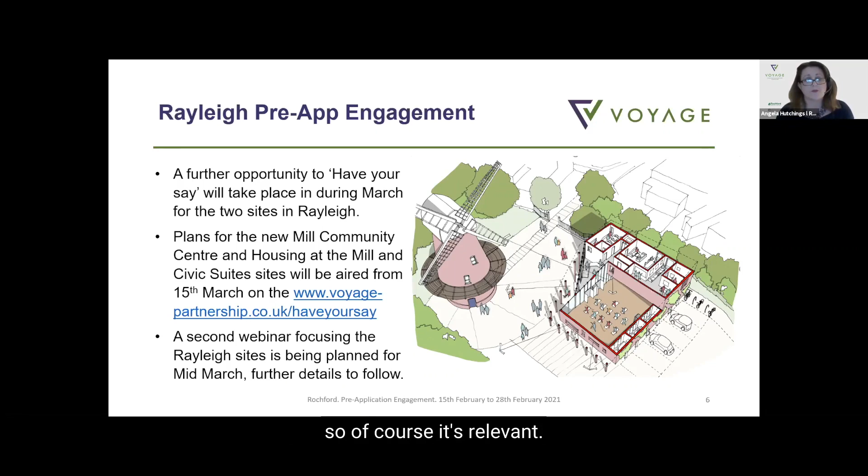So we will do all this over again on the 17th of March when we'll specifically be addressing the Rayleigh sites. And as Mike says, that doesn't mean you can't ask questions about that tonight, but because we are taking a programme approach, of course it's relevant. But please be assured that we will specifically focus on the Rayleigh sites, and in particular the Mill Hall, next month. Thank you, Mike.

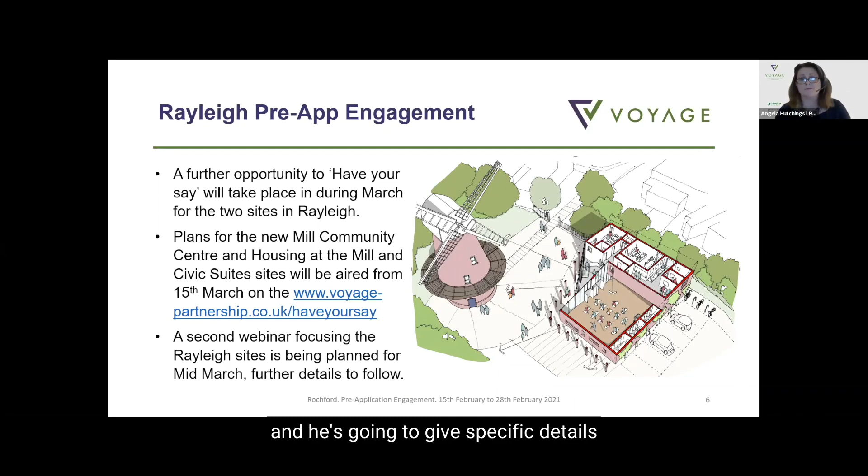Thank you, Angela. I'm now going to hand over to Peter Buist, who's going to give our next presentation, and he's going to give specific details of the designs, the core principles, and the importance of our heritage relating to each of the three Rochford sites, in what will be the longest presentation this evening. Over to Peter. Thank you.

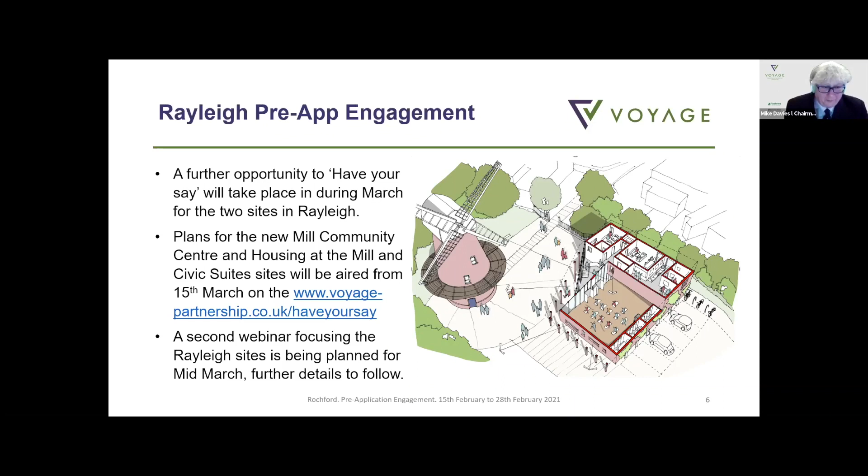Thanks, Mike. Good evening. My name is Peter Buist, and I'm an architect from Purcell. We're a practice of architects, master planners, and heritage consultants, and we specialise in working with buildings and sites that have conservation and heritage constraints.

We've been working with GB Partnerships and Rochford District Council for approximately 18 months, analysing and understanding the existing sites and developing outline proposals for their future.

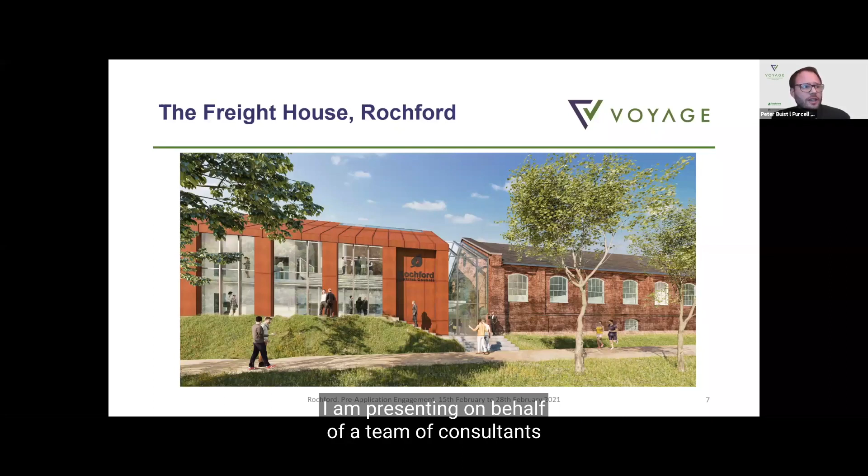Whilst I'm an architect, I am presenting on behalf of a team of consultants engaged on these projects, including many specialists such as civil, structural, and building service engineers, heritage consultants, tree specialists, and ecologists.

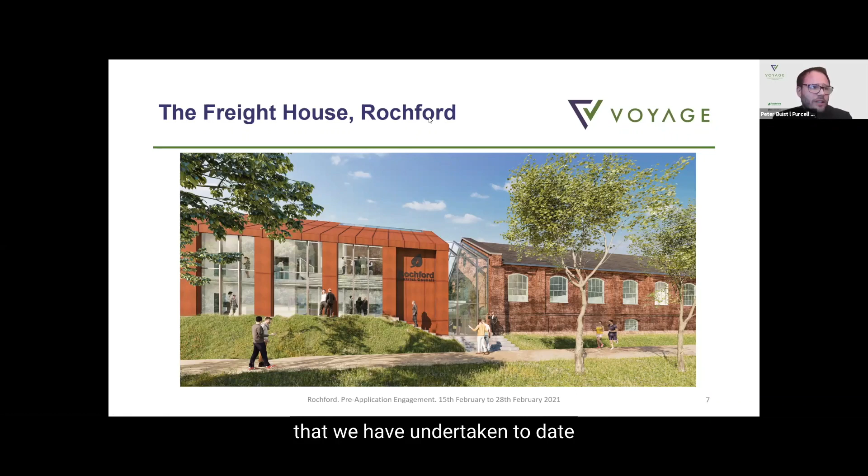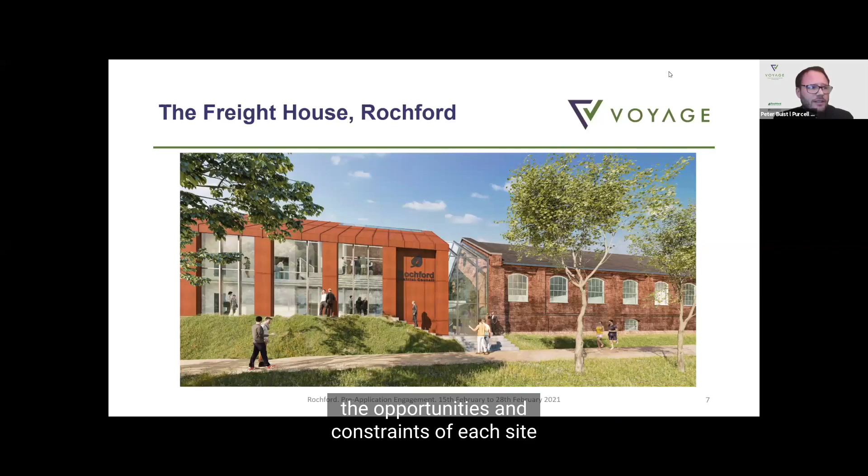I'll now provide an overview of the work we have undertaken to date across the three sites in Rochford, including the project objectives, the opportunities and constraints of each site, and the principles of our concept designs.

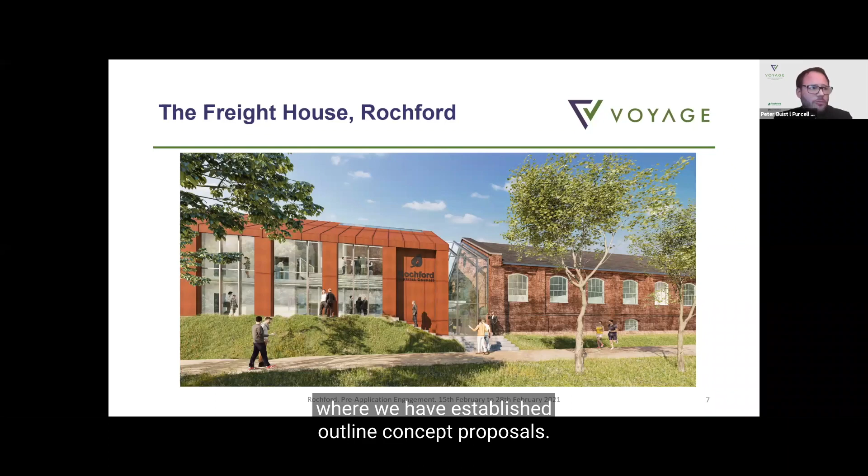The designs on each of the sites are at an early stage of development, where we have established outline concept proposals. I'll start with the Freight House and then move on to 3 to 15 South Street, and finish with number 57 South Street. So starting with the Freight House.

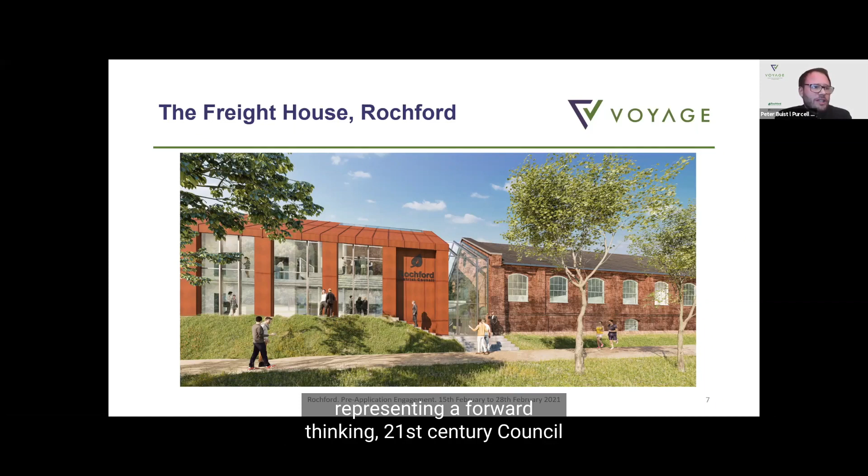The Freight House is to become a brand new civic and community hub, representing a forward-thinking 21st century council set upon the foundations of a rich and proud history.

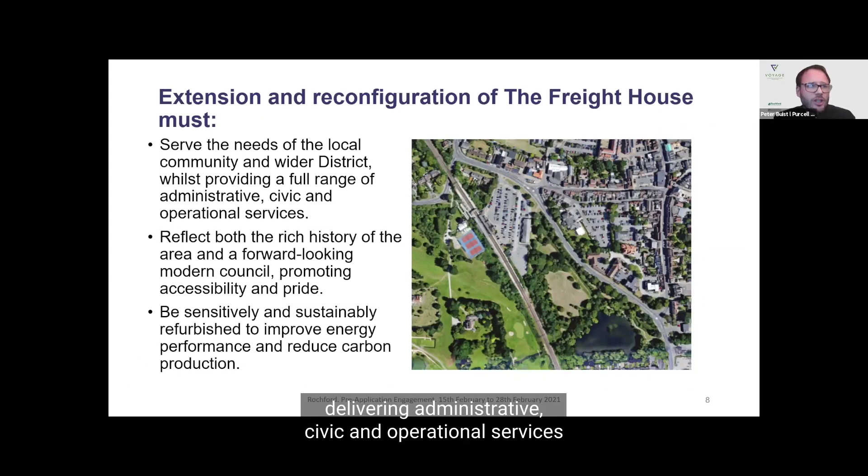This new community hub will serve the communities of Rochford and the surrounding district, delivering administrative, civic, and operational services within a welcoming, accessible, customer-focused, and safe environment.

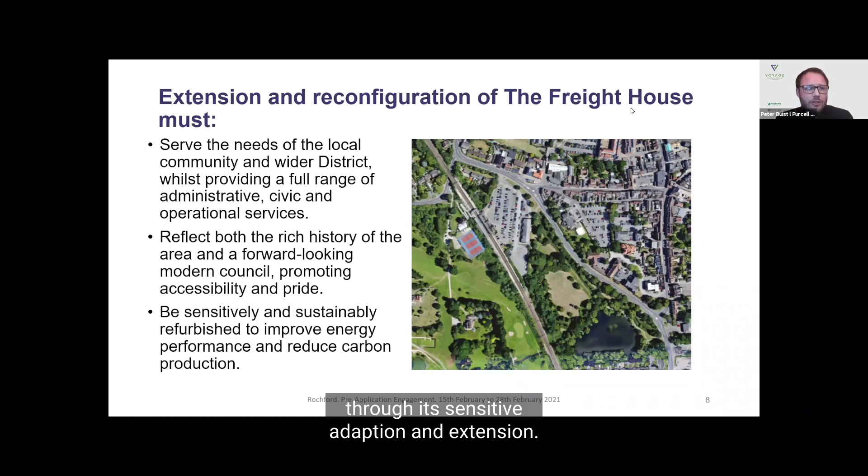The existing building offers a wonderful opportunity to create a facility that reflects the rich history of Rochford. Through its sensitive adaptation and extension, we can also create a sustainable, efficient, and modern building that fulfills the community's expectations of the council's services.

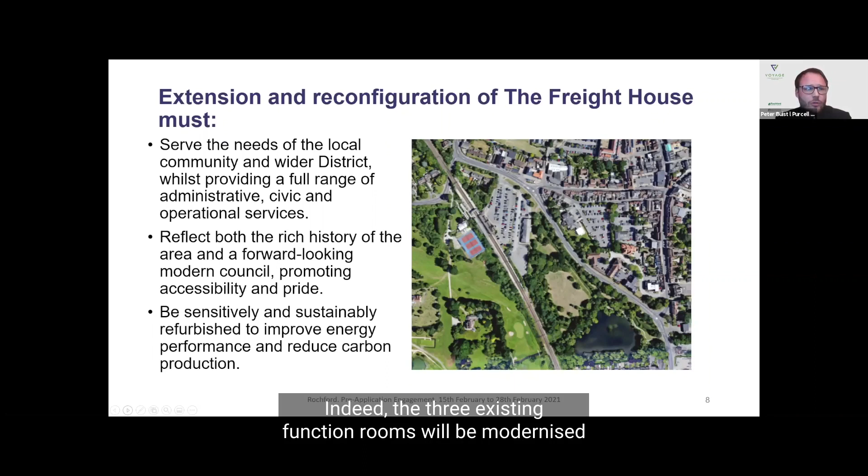The Freight House will continue to provide versatile and flexible space for many community, public, and private events. Indeed, the three existing function rooms will be modernised in order to best cater for the wide variety of local events.

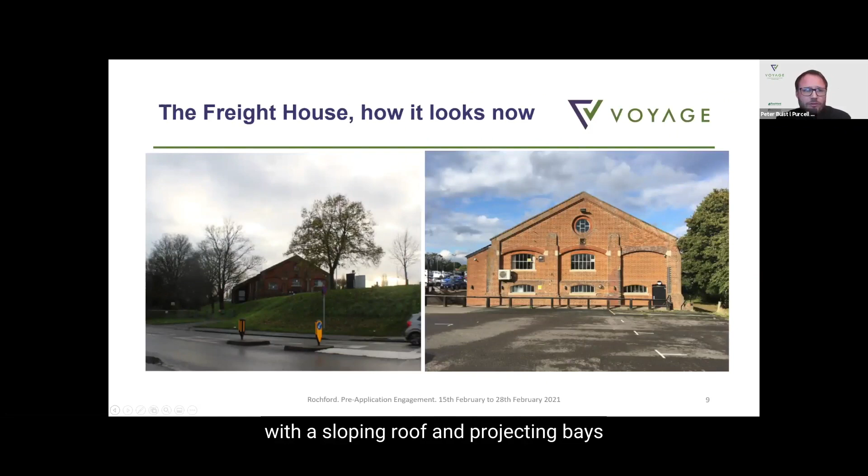The Freight House is a late Victorian red brick building with a sloping roof and projecting bays to the west elevation that mark out the various entrances to the building.

The Freight House lies along a north to south line and is a large building that sits on top of the grass bank that looks onto Bradley Way.

Bradley Way is a busy road into and around Rochford, and therefore the Freight House is highly visible to those coming in and out of the town.

Whilst its industrial heritage is still clearly evident in its external appearance and the internal plan arrangement, there have been some less sensitive adaptations and additions over the last 40 years. Our proposed refurbishment of the building is an opportunity to rectify these late 20th century alterations with more sensitive changes.

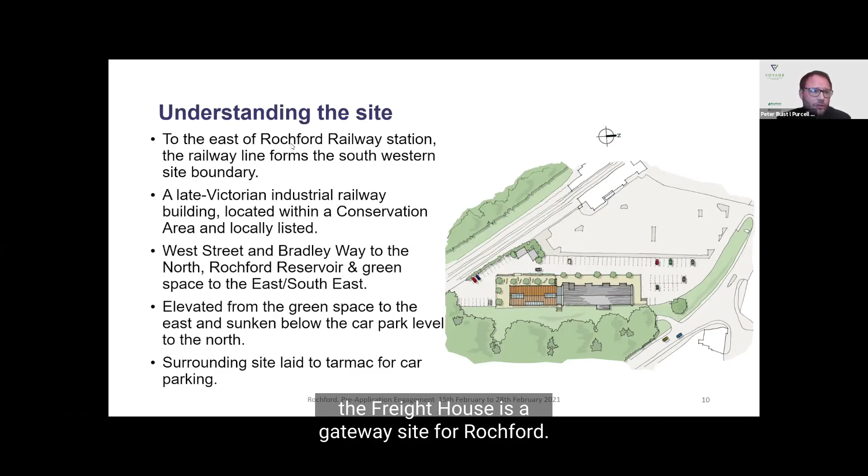Located opposite the railway station and above the busy road, the Freight House is a gateway site for Rochford. It is locally listed and located within the Rochford Conservation Area. Proposals must therefore be sensitive to both the building itself and the historic character of its surroundings.

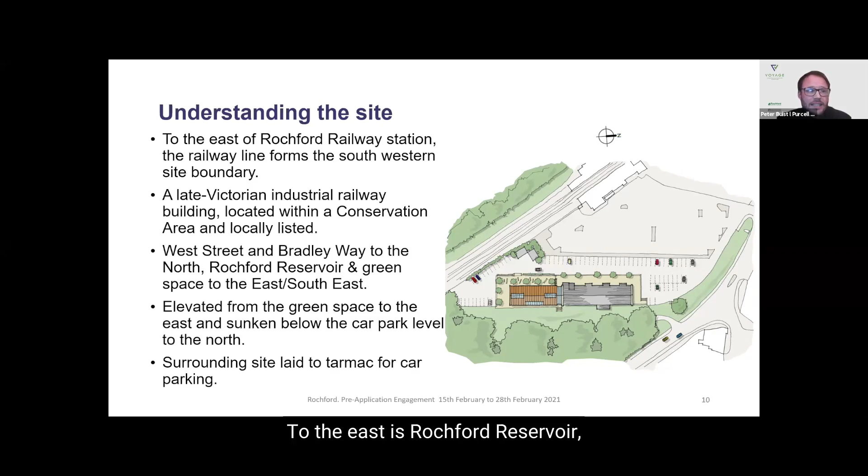To the east is Rochford Reservoir, creating a wonderful setting for the building and an opportunity for public and civic events to spill out into the adjacent parkland. The building itself is sunken below the level of the car park that surrounds it to the north, west, and south. Conversely, a steep grass bank drops down from the building's east elevation to meet the parkland and footpath that goes around the reservoir.

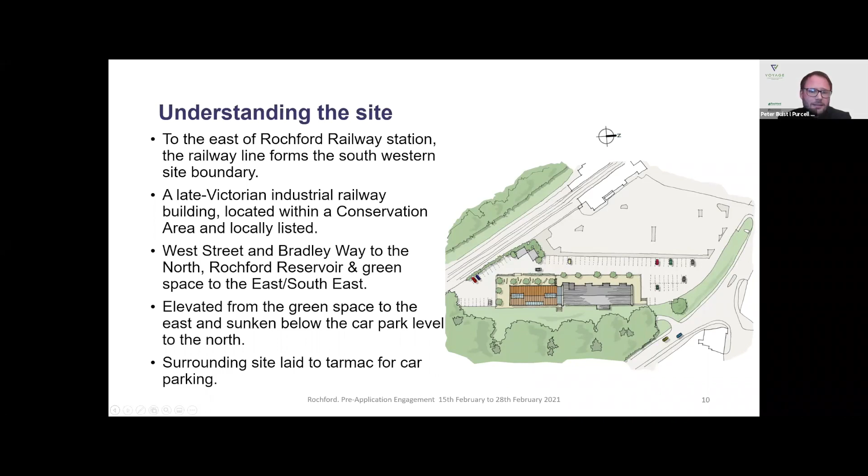To accommodate the council's brief, the existing freight house needs to be extended. We explored a number of options for the form, location, and size of the extension. These included new extensions to the north, west, and south of the existing building.

Locating the extension to the south of the site allows the historic freight house to remain visible from Bradley Way and maintains the important link with the railway station. The extension will also benefit from being close to the reservoir and parkland to the east. Through a new master plan for the site, the project is an opportunity to improve the immediate setting of the freight house, which benefits accessibility and functionality.

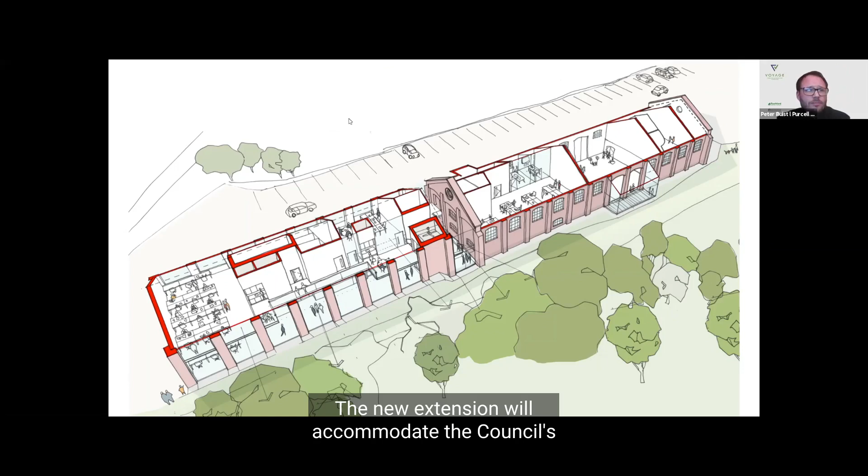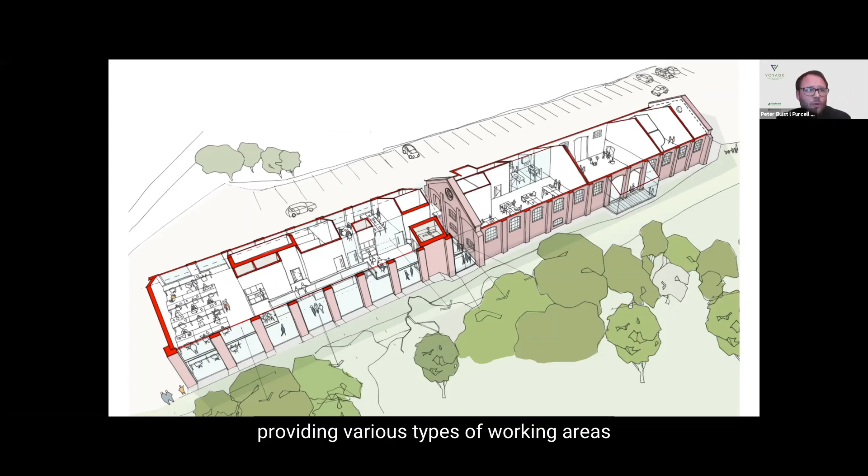The proposed new extension will be 2 stories high and has many similarities to the existing building. The new extension will accommodate the council's administrative functions. Office spaces, meeting rooms and breakout areas are located across the ground and first floors and will be flexible, providing various types of working areas for individuals and groups. Enclosed meeting pods will be provided for more sensitive and confidential meetings.

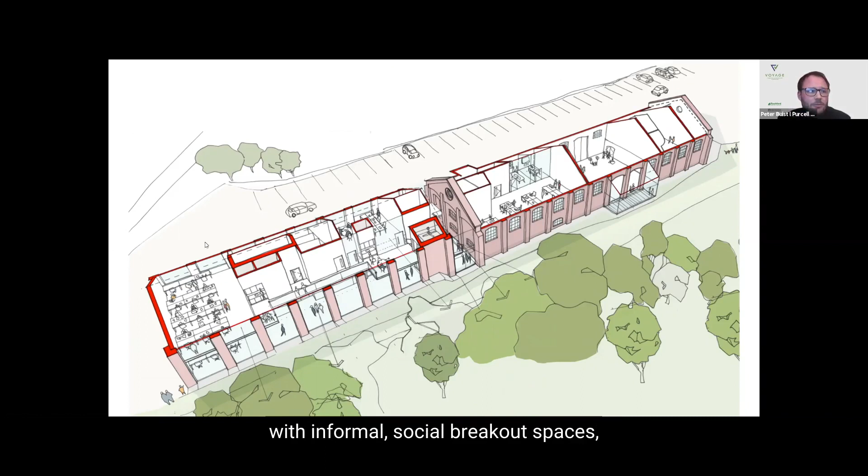An open double-height atrium allows people to move about the extension with informal social breakout spaces and lovely views over the nearby parkland, trees, and reservoir. A new lift will ensure the building is fully accessible to all staff, visitors, and public.

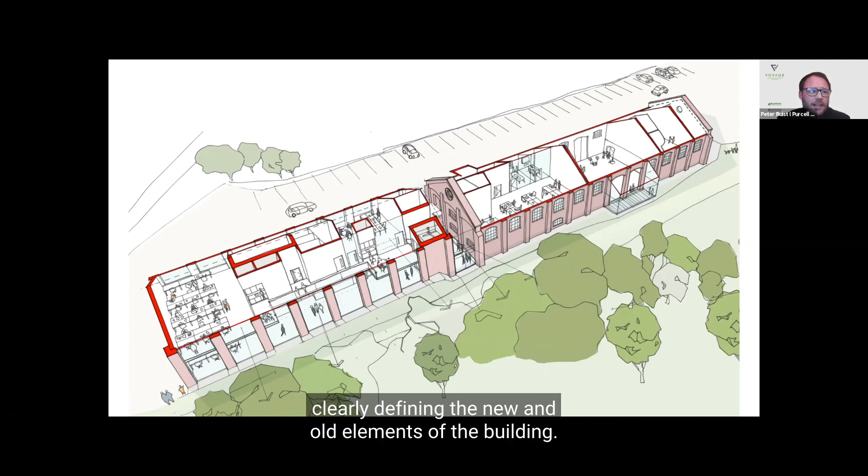A glazed atrium separates the new extension from the existing freight house building, clearly defining the new and old elements of the building. This glazed atrium will be the new public entrance, providing a wonderful arrival space which will make it easy to find your way around.

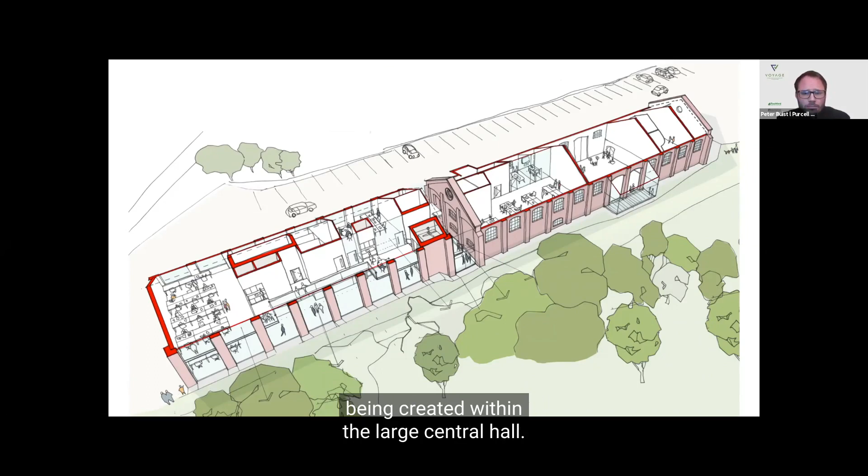The existing freight house will accommodate the civic functions, with a new council chamber being created within the large central hall. When not required, the chamber will be dismantled and stored to enable the large hall and the other 2 function rooms to be used for many other public and private events.

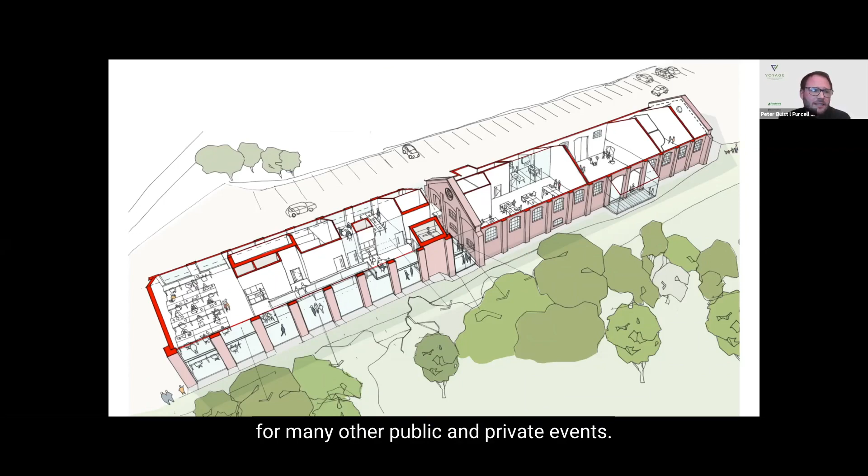The function rooms will be supported by modern kitchen and catering facilities. Bars and serveries and secure storage will also be provided.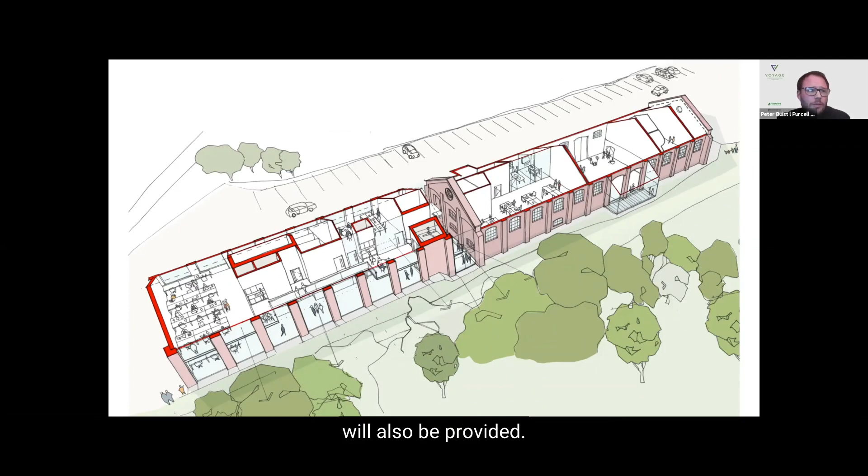The function rooms will be enhanced to control sound so that they best accommodate the wide variety of uses, as well as stopping noise coming out of the building during louder evening functions. Each function space is independently accessed so that events can be held at the same time without disturbing each other.

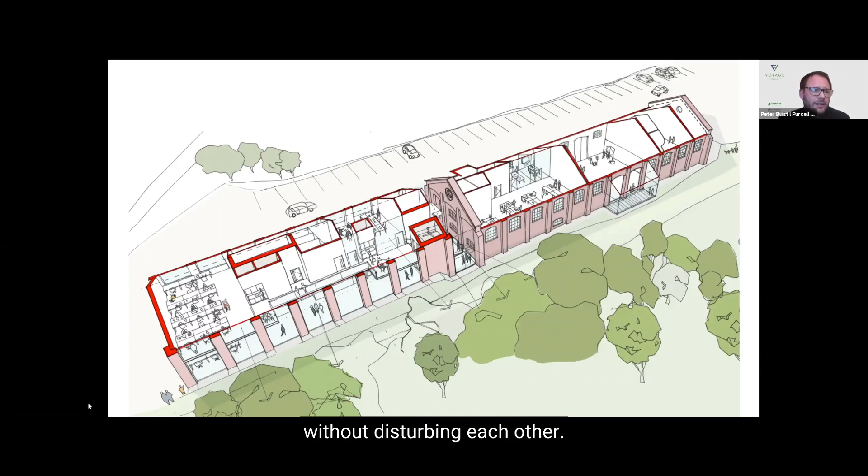So in summary, the proposals approximately double the overall gross internal area of the freight house, albeit the footprint of the new extension is smaller due to the more efficient use of space across 2 stories. The 3 existing function rooms within the Freight House will be retained and modernised to accommodate a wide variety of public and private events, including the installation of the council chamber.

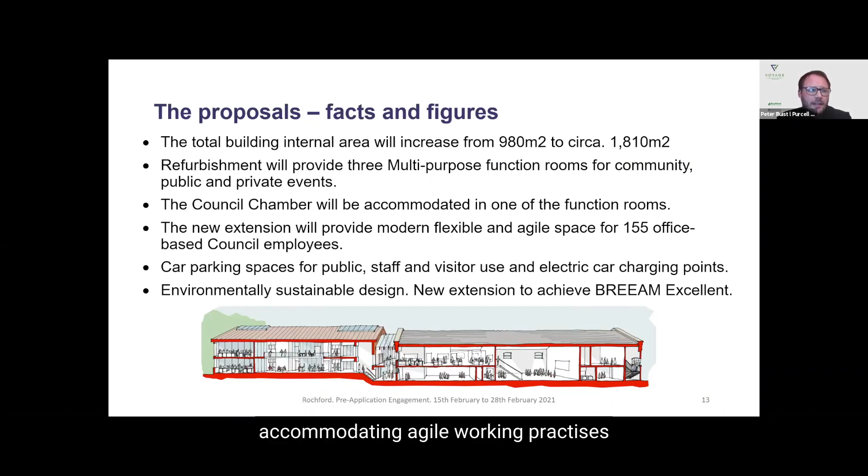The new extension will be modern, a flexible working environment, accommodating agile working practices and providing a wide variety of individual and collaborative working environments.

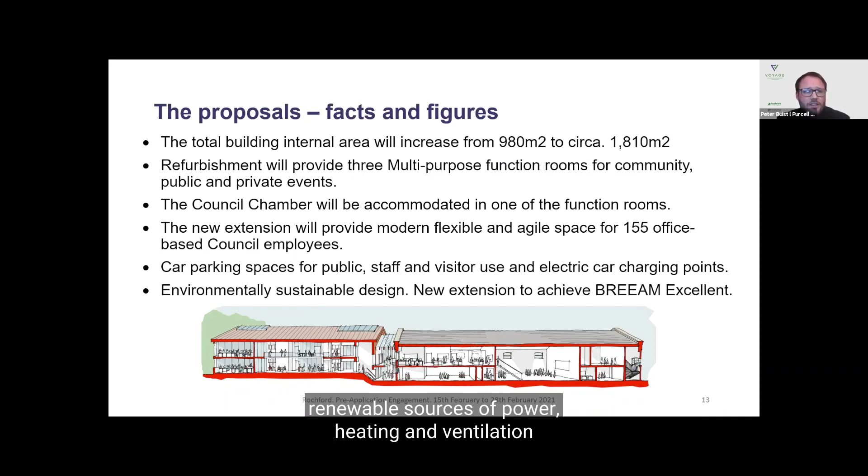Careful selection of materials, high levels of insulation, renewable sources of power, heating and ventilation, and car charging points will all ensure the building is constructed and operated as environmentally sustainably as possible. The project is an opportunity to create a truly unique public building for the communities of Rochford and the surrounding district. Next slide, please.

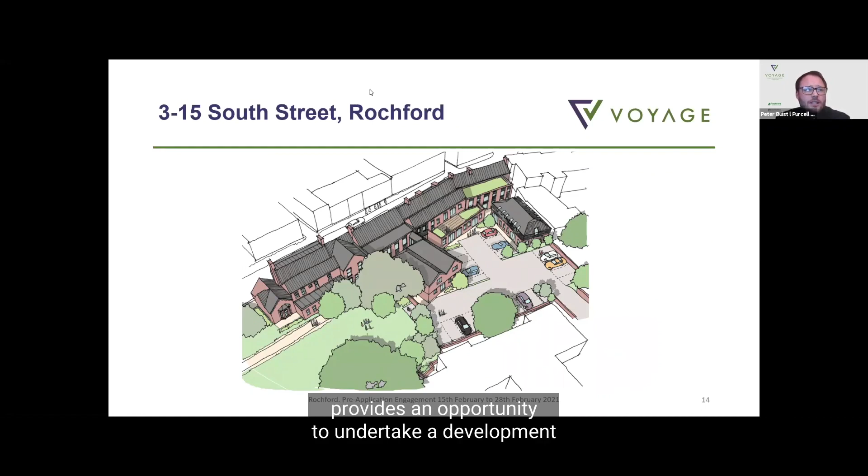A short walk from the Freight House is the site at 3 to 15 South Street. The relocation of council services to the Freight House provides an opportunity to undertake a development at 3 to 15 South Street that restores the existing historic buildings and secures their future through conversion back to residential use.

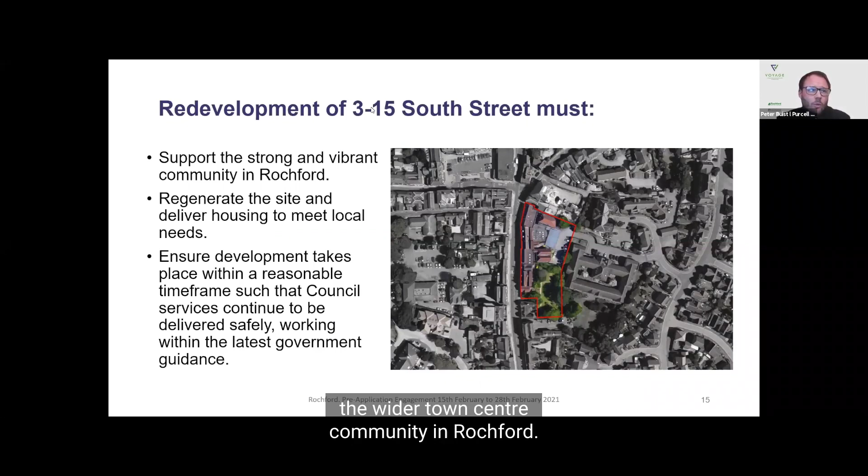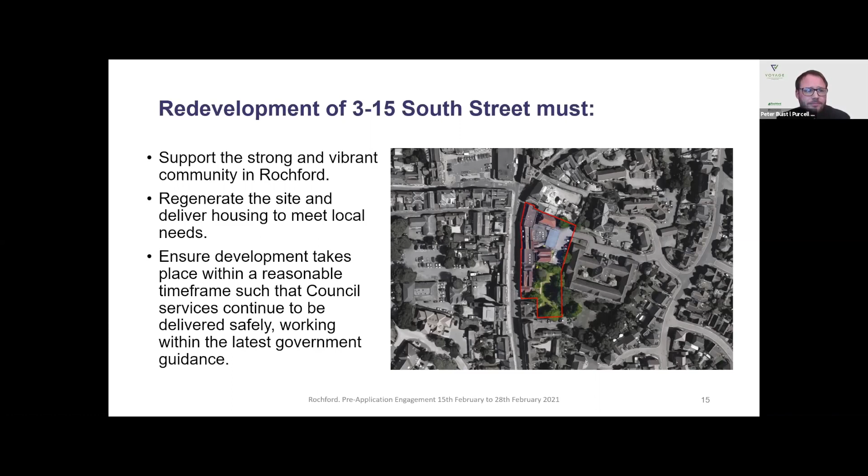The regeneration of the site will deliver high quality and affordable housing that will support and strengthen the wider town centre community in Rochford. The timing of the development will be carefully programmed with the Freight House to ensure council services continue to be delivered safely, whilst also delivering housing that meets local needs within a timely fashion. In addition, the development will retain, conserve and enhance the existing listed buildings and heritage assets on the site.

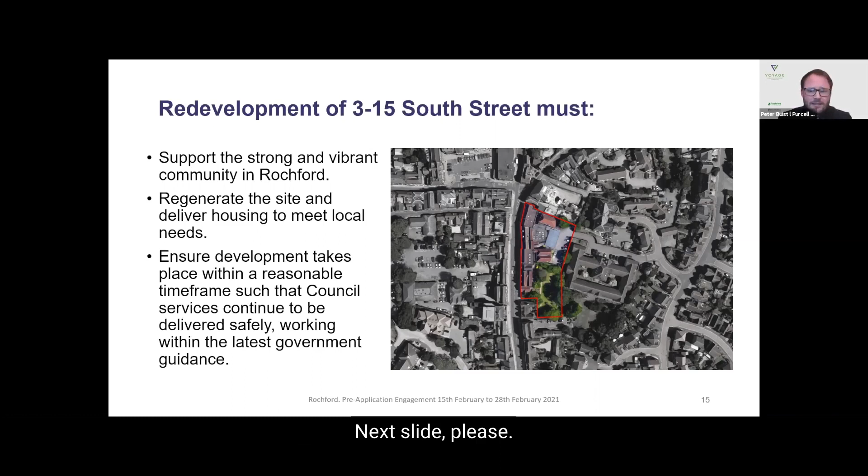Numbers 3 to 15 form a continuous frontage onto the east side of South Street. Predominantly 2 and 3 stories in height, the buildings contribute strongly to the character of the street, which is also in the Rochford Conservation Area. More modern late 20th century additions that are 1 and 2 stories in height are present to the rear. Whilst the buildings along South Street form a continuous row, each plot is distinct in the way it looks on to the street, which reflects their former uses as individual houses.

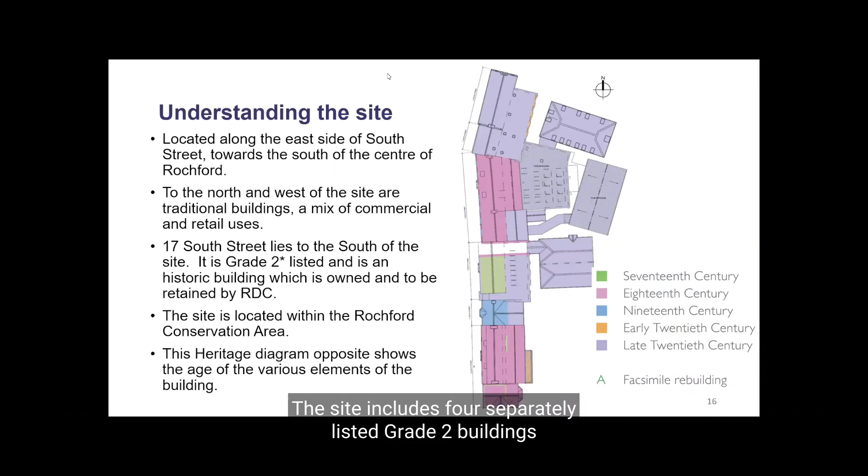The site includes 4 separately listed Grade 2 buildings and is also adjacent to the Grade 2 star listed 17 South Street. Consequently, we have focused on the heritage of the site, and we have plotted the age and historic significance of each building within the site and its component parts, such as internal walls, staircases, and character features. This has allowed us to appreciate which parts of the site are important and must be retained and restored, and which parts can be removed or adapted to accommodate the development.

As well as this heritage understanding, our work also includes the analysis of the wider site and surrounding area, such as vehicular and pedestrian access, views into and from the site, privacy of neighbouring houses, and ecological and arboricultural constraints. Next slide, please.

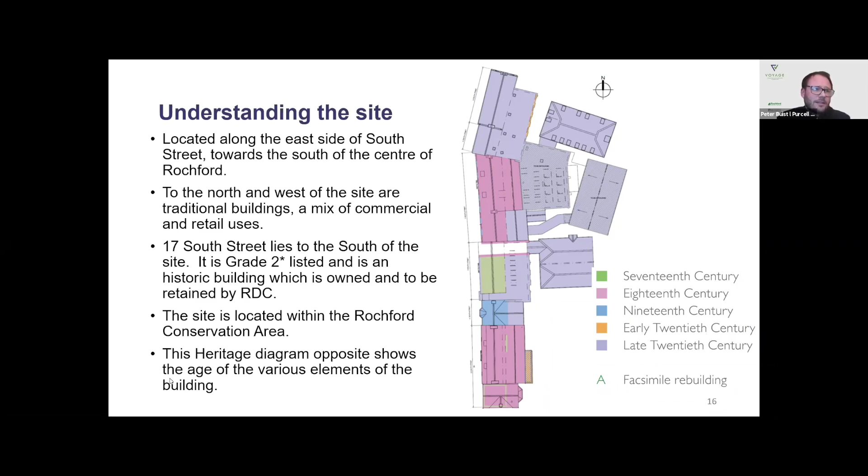The underlying principle of the proposals is to restore and conserve the listed buildings and the elements of the site that positively contribute to the conservation area. This is achieved through their adaptation and reuse as residential apartments.

Our proposals include the removal of less sensitive alterations that date from the late 20th century, both internally and with the removal of the modern single-storey extensions to the rear of the site. Using archival research, the internal rearrangement of the buildings will seek to restore historic room proportions, reinstate staircases and hallways, and re-establish active front doors onto South Street.

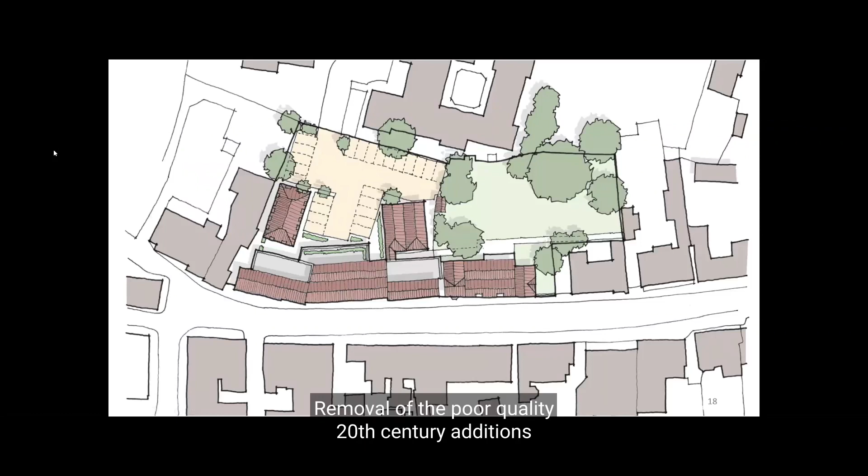Removal of the poor quality 20th century additions to the rear of the site improves the setting of the historic buildings that front onto South Street and allows for more residential and visitor car parking on the site.

Private and shared amenity space is provided, along with refuse and bicycle storage. The landscaped walled garden that spans from the rear of number 11 South Street south to the rear of number 17 will be retained and preserved as a shared garden.

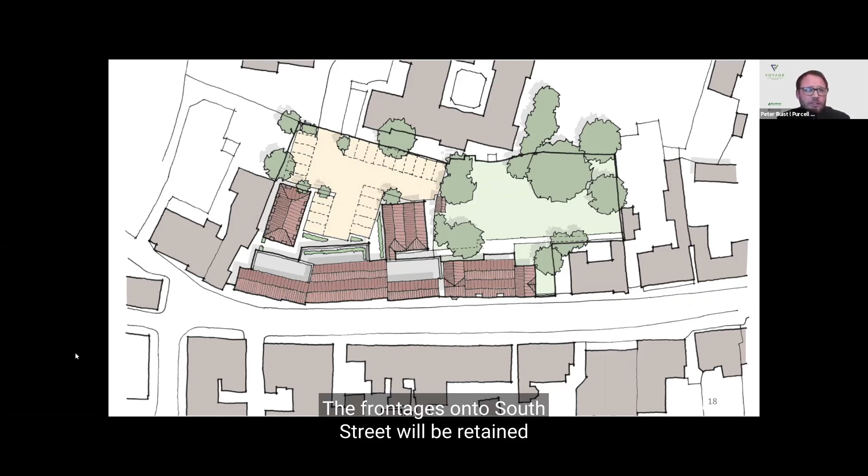The frontages onto South Street will be retained and relatively unaltered. Existing historic windows, doors, facades, and details will be restored. Pedestrian access will be maintained by the existing access route from South Street between numbers 7 and 9. The existing vehicular access from the east via Millview Meadows and Millview Court will also be retained.

There is no new build development proposed on the site at 3 to 15 South Street. More the careful and sensitive conversion and adaptation of the existing buildings.

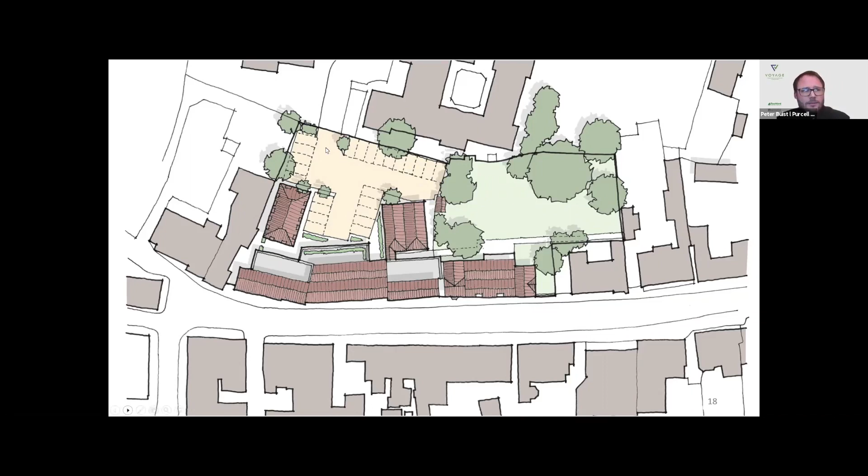So, in summary, the outline proposals provide 20 one, two, and three bedroom apartments. 35% of the dwellings will be affordable. On-site car parking is provided for residents and visitors, and secure bicycle and motorbike storage is also provided.

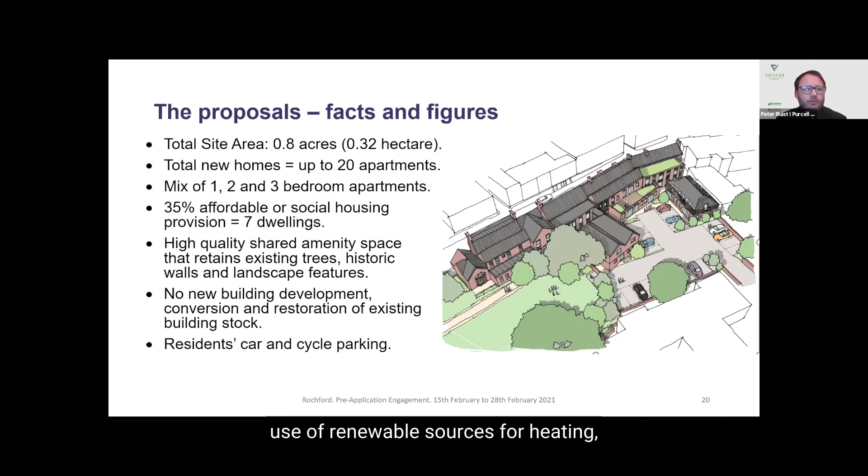The adaptation of existing buildings to accommodate new uses is fundamentally sustainable when compared to a whole site redevelopment. Whilst the heritage significance of the existing buildings and the wider conservation area will of course be respected and prioritised, the selection of low carbon and low energy materials, improvement of thermal insulation within external walls and roofs, use of renewable sources for heating, and where possible, solar panels to generate electricity on site, will all contribute to an environmentally and historically sensitive development.

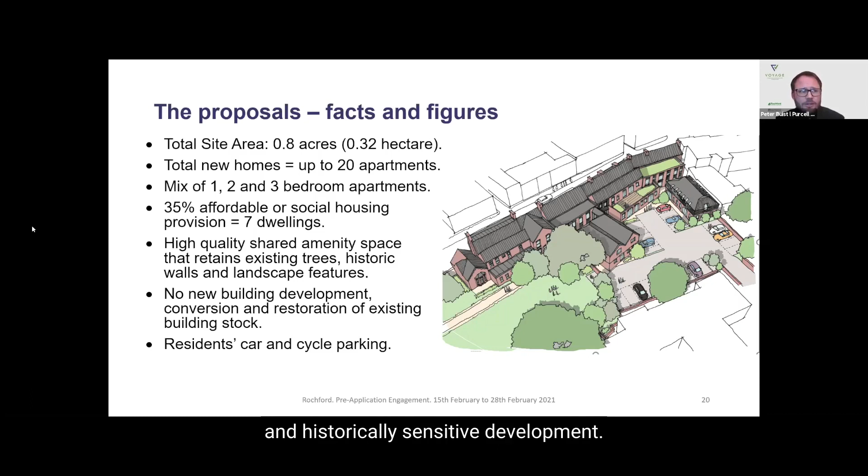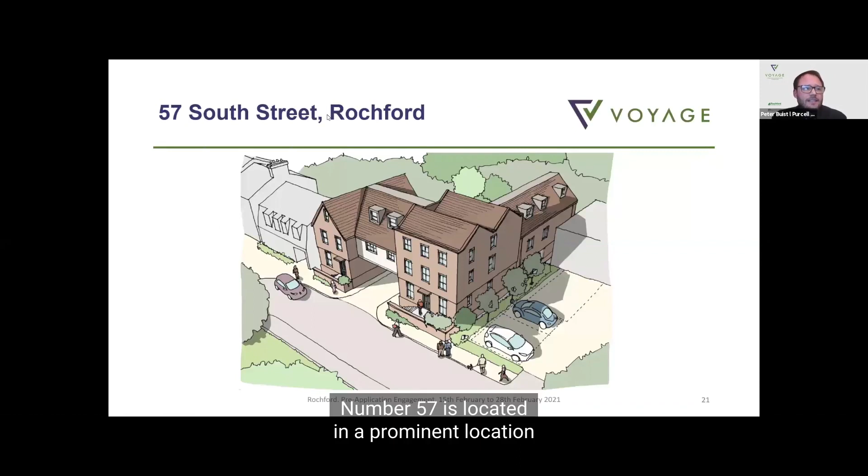Number 57 is located in a prominent location at the southern end of South Street, opposite the busy junction with Bradley Way and Southend Road.

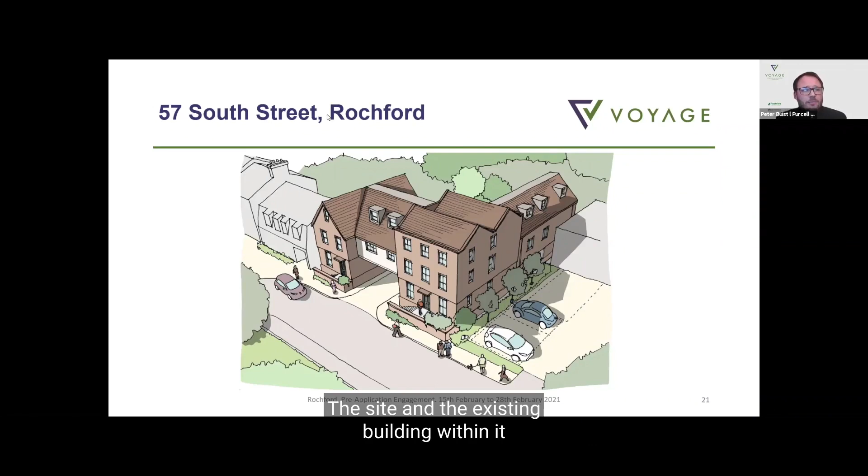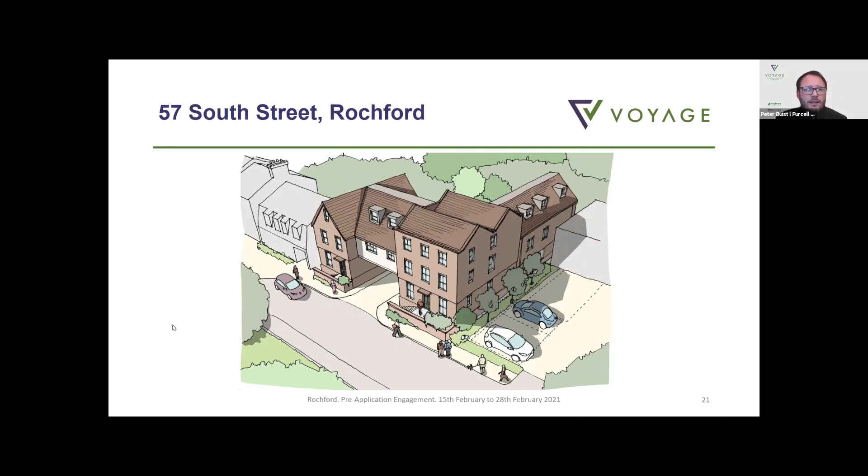The site and the existing building within it has been vacant for many years. It is in close proximity to the River Roach, and consequently the site is within flood risk zone 3. This means it is liable to flooding.

The objectives of the redevelopment of 57 South Street are to regenerate through residential development, providing housing that meets local needs. The redevelopment must address and deal with the flood risk that presently restricts the way the site can be used.

Understanding the key opportunities and constraints of the site directly informs our outline proposals. The existing building is not listed, but the site is located within the Rochford conservation area, and as I've mentioned before, adopts a prominent gateway position to the town.

The existing building is in poor condition and accommodates the southern portion of the site, with the northern two-thirds being predominantly left to overgrown hard standing. The site has an existing vehicular access from South Street, and the site demise includes 8 parking spaces accessed across the fire station forecourt. Indeed, a number of these are in use by Rochford Fire Station themselves.

The trees to the rear boundary are in a poor condition, and therefore their removal and replacement through a suitable replanting strategy would be beneficial. The site's surroundings combine a number of different use classifications, with residential dwellings to the north and northeast, commercial uses to the northwest, and the fire station and industrial units to the south and east.

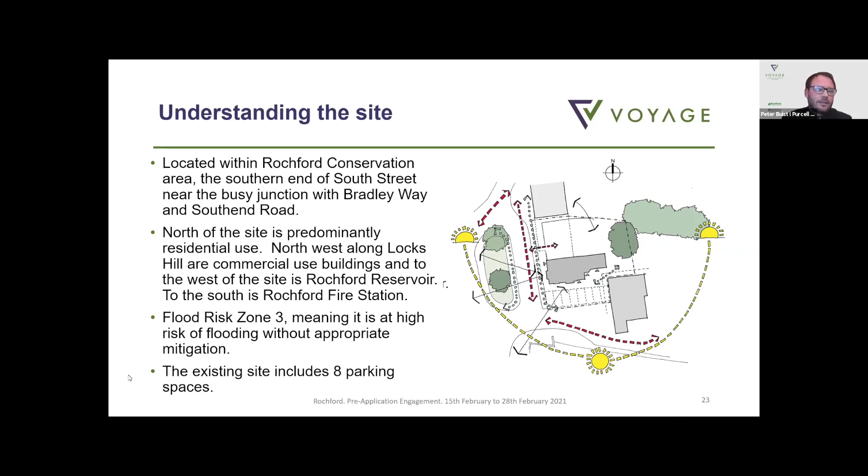Whilst options to restore and convert number 57 South Street have been explored, the risk of flooding to the site severely compromises the use of the existing building, and therefore the viability of its retention. The demolition of the existing building will allow a new residential development that can address and overcome the flood risk issues.

Despite its current condition, we appreciate that the existing building at number 57 does contribute to the character of the conservation area. Therefore, any replacement must be of a very high quality and appropriate and sensitive to its surroundings, with particular recognition of the site's prominent location.

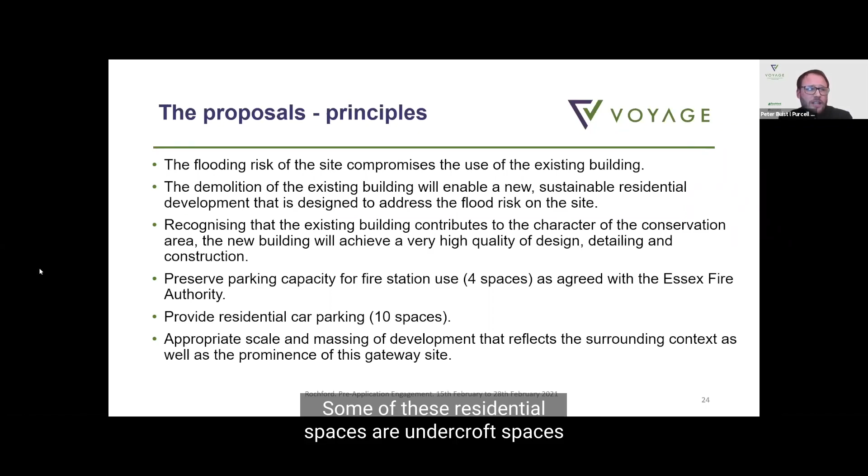The scheme will preserve the parking capacity for the fire station and provide residential and visitor car parking spaces on site. Some of these residential spaces are undercroft spaces that are located at ground level beneath the rear part of the building.

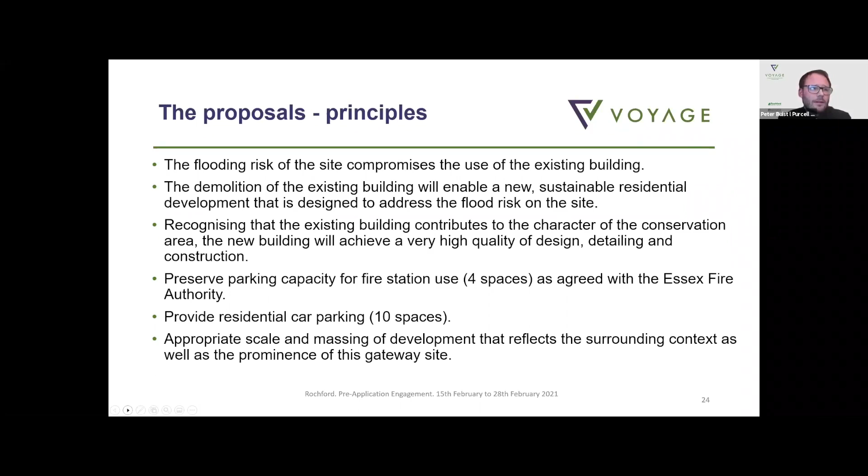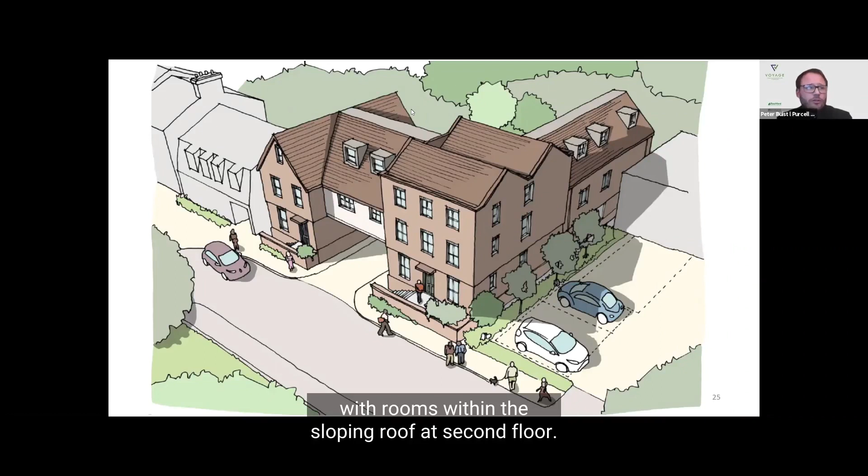The outline scheme proposals include a two-storey development to the north and east, with rooms within the sloping roof at second floor. A three-storey element that draws inspiration from the Georgian and Victorian houses further north along South Street articulates the corner of the site and its prominence on the street scene.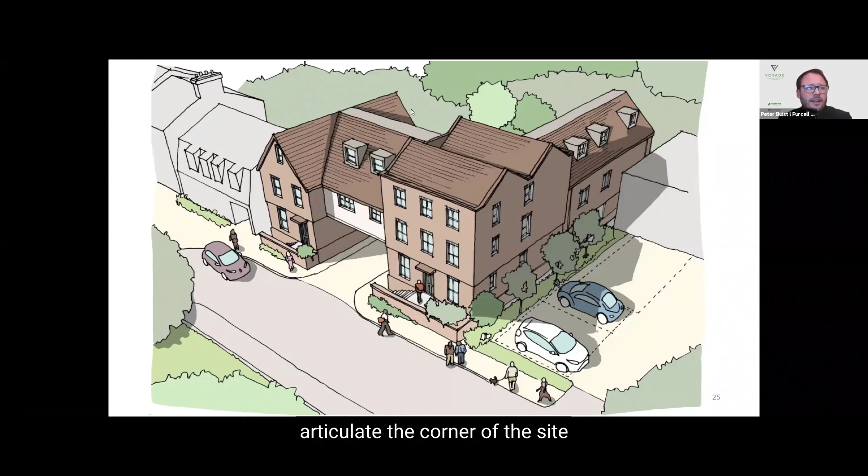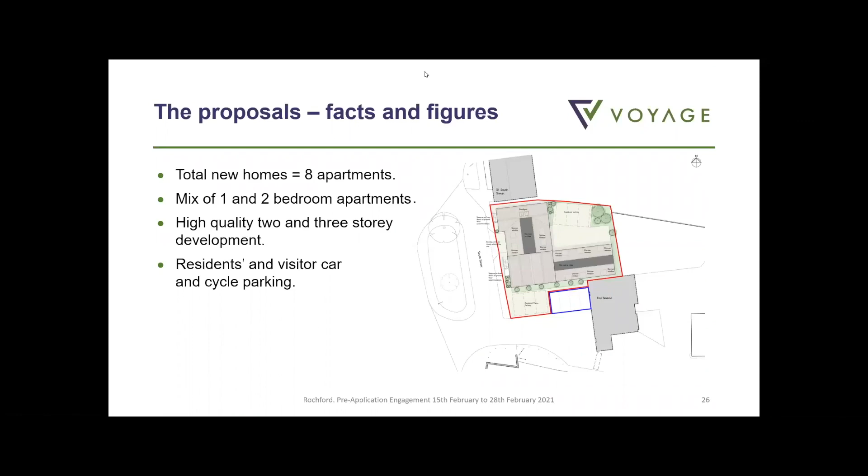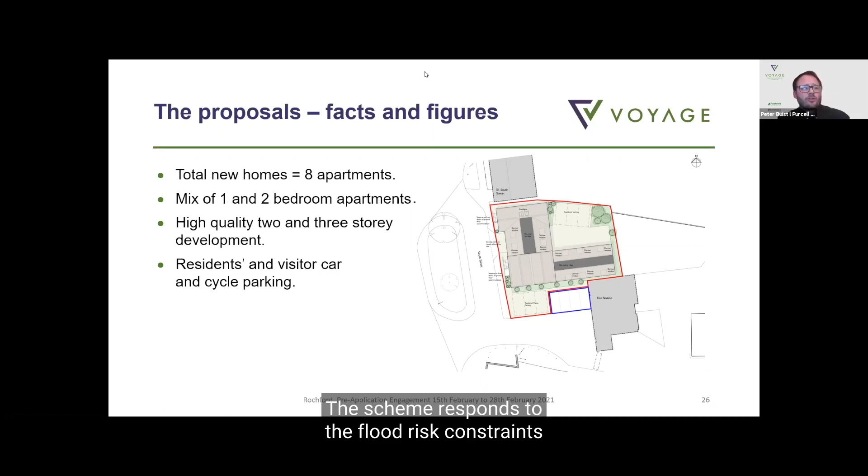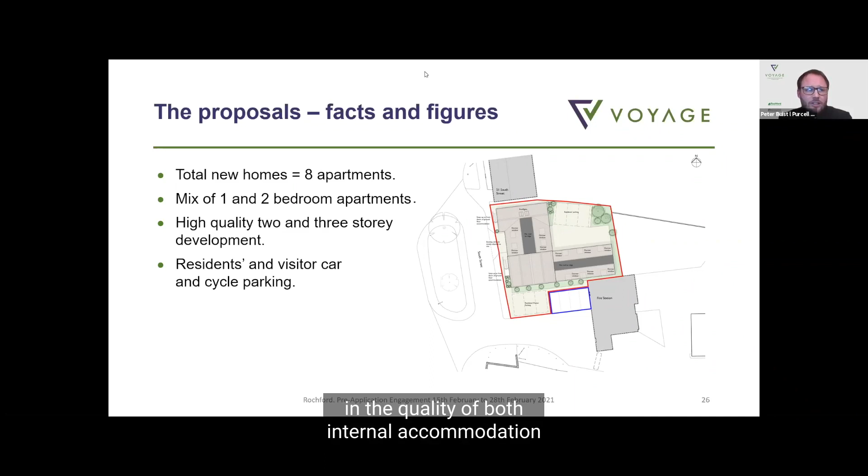In summary, the current proposals provide 8 new residential dwellings at a mix of 1 and 2 bedroom apartments. The scheme responds to the flood risk constraints on the site by elevating the habitable ground floor levels and keeping the actual footprint of the building, where it touches the ground, as small as possible. Car, bicycle, and motorbike parking is provided for both residents and visitors. The outline proposals for number 57 South Street provide a development that is an exemplar in the quality of both internal accommodation and external appearance that this prominent gateway site demands.

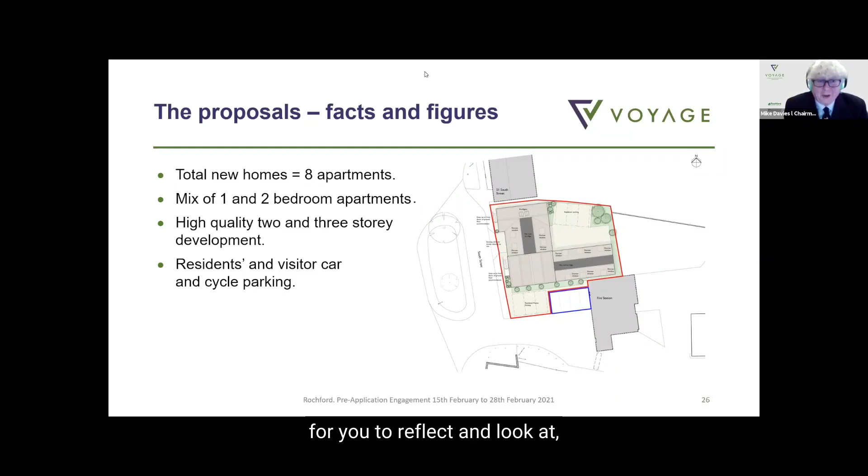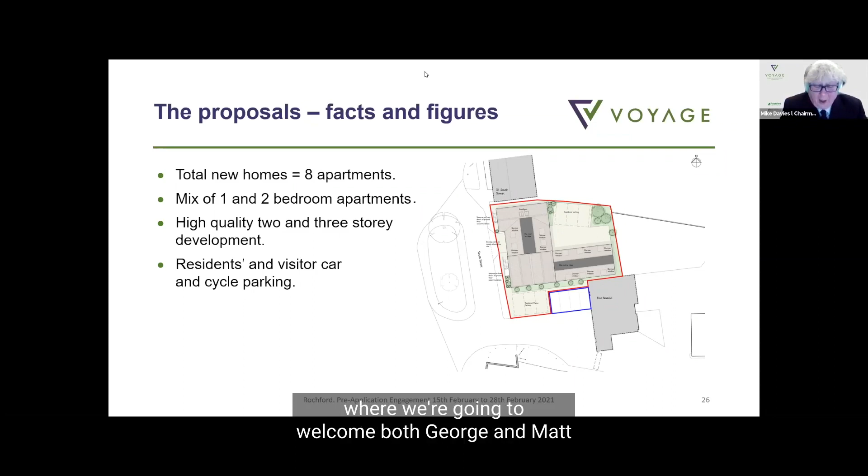I'm now going to move on to the next part of the presentation, where we're going to welcome both George and Matt to deal with various aspects. George will start with details of the overall benefits of the asset delivery programme and how the ongoing and updated information can be viewed by the public on both the RDC and Voyage websites, and perhaps most significantly, how you, the general public, can personally engage in this process. Matt will join in with any specific details from an RDC's perspective.

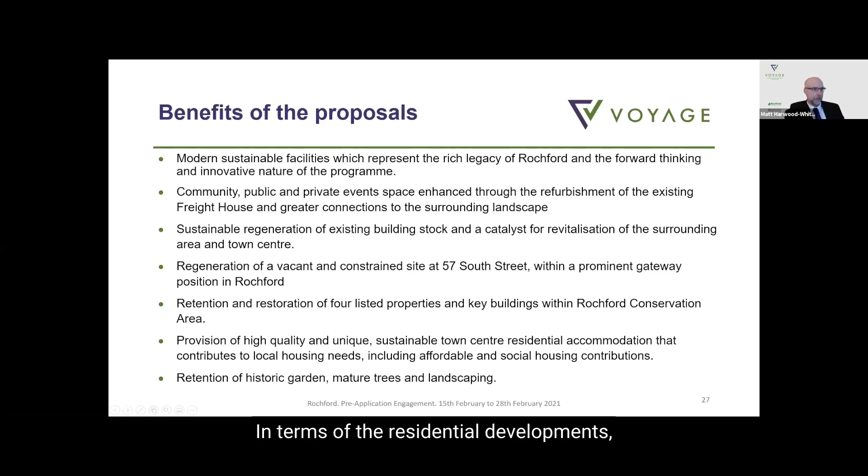I feel as a project, it's a key opportunity for us to bring that site forward as well. The development of the Freight House will be sensitive and sustainable, delivering improved energy performance and reducing carbon footprint at the site. In terms of the residential developments, we will bring forward high quality, sustainable town centre accommodation that will contribute to local housing need, including affordable and social housing, meeting or overachieving on the council's policy.

Moving on to social value, it's been a key theme since the early part of the programme. Essentially, social value is how we can deliver wider social, economic and environmental benefits through the programme. We set out the importance of this right from the early stages of the programme, and GB Partnerships as our partner have responded very positively to this. When we talk about social value, we're looking at skills and employment, for example bringing forward apprenticeships and work placements as a result of the developments.

We're also considering our local supply chain, how do we source locally for example. We're also considering how we protect the environment through sustainable solutions and energy efficient developments. And perhaps most rewarding of all, engaging local schools, social enterprises, businesses and groups to ensure they have an opportunity to engage in the programme.